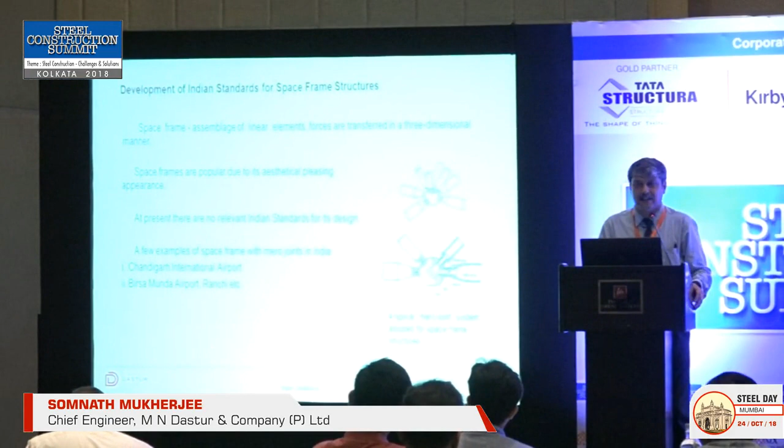This last point being, I'm sure we are going to see quite a few structures and presentations on space frames, which are definitely the thing in the market. But unfortunately, we have requested BIS, in the forum also, and the Undersecretary Steel, Mr. Sunil Barthwal, at the INSDAC forum, that the relevant Indian standard has to come out. Designers in India have to be much more dependent on foreign journals and international codes.

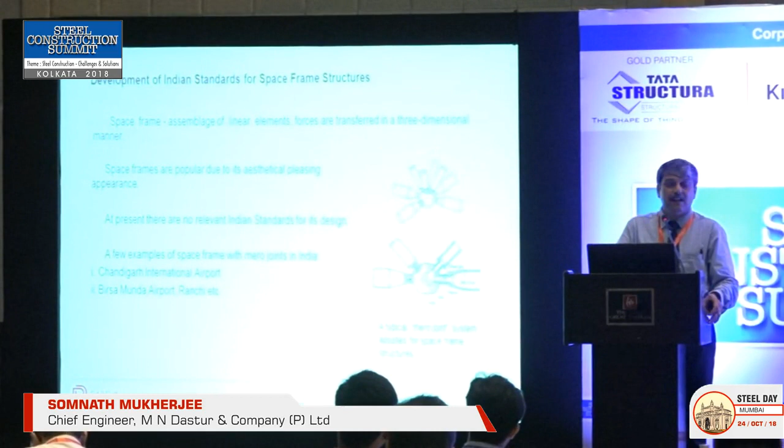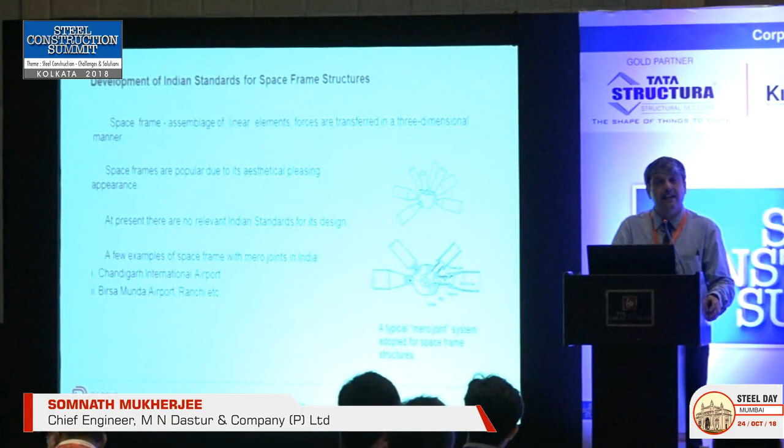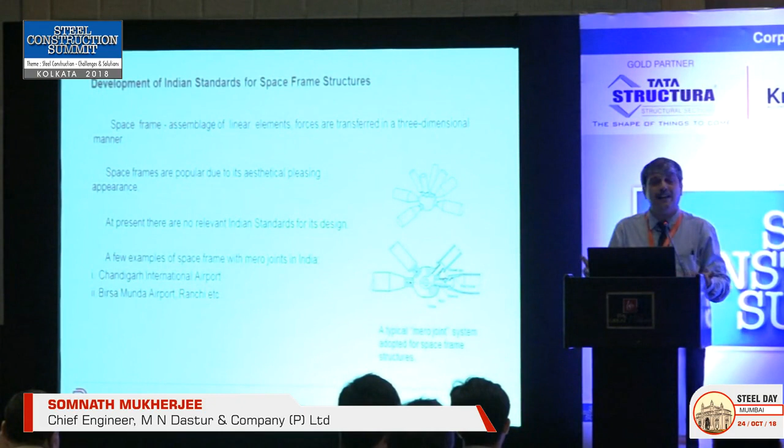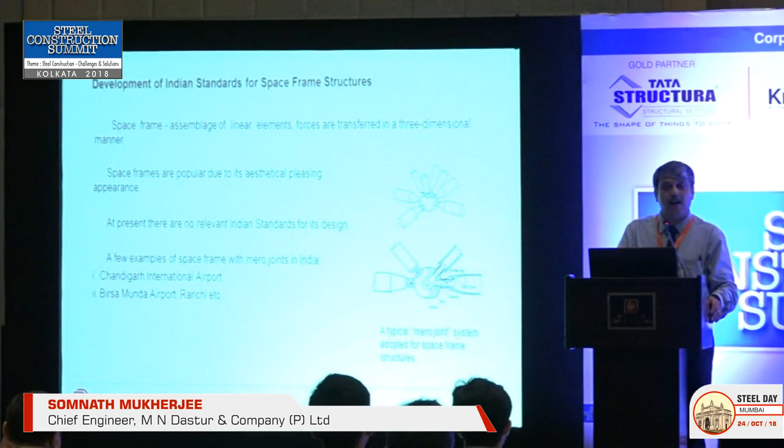Like the niche, patented design of the Mero joint, which you might have seen in the Birsa Munda airport at Ranchi and the Chandigarh International Airport. Quite a few airports were mentioned by Avneet at the very onset. This ball and socket kind of joint is called the Mero joint. The design is almost patented by the Chinese, and we also have the Canadian code, but the Indian code needs to imbibe these things. Otherwise, it's very difficult for us to design, and to design it correctly.

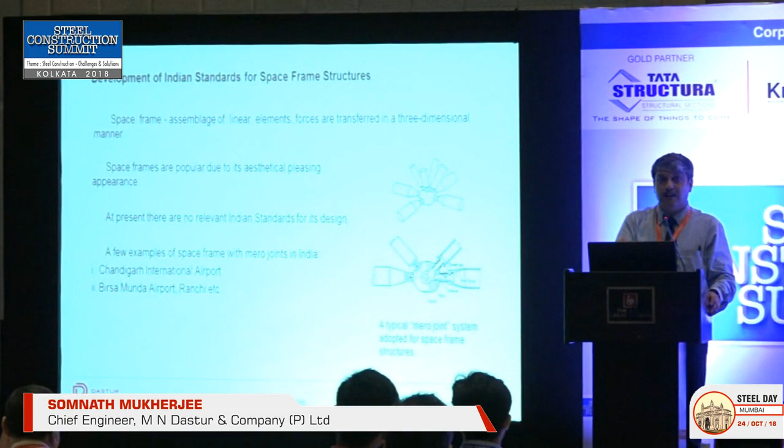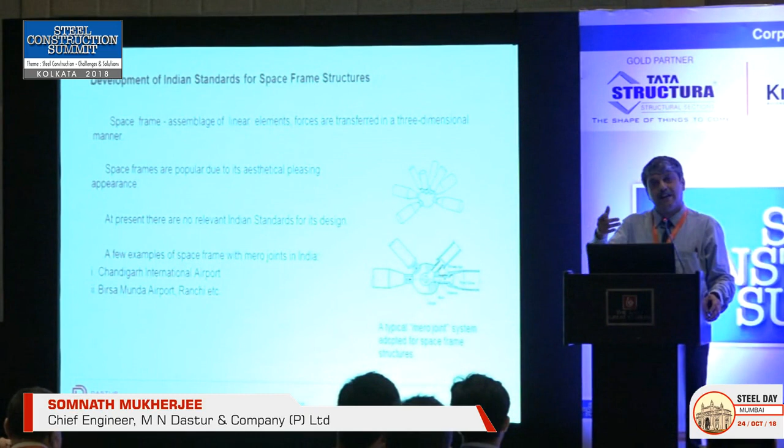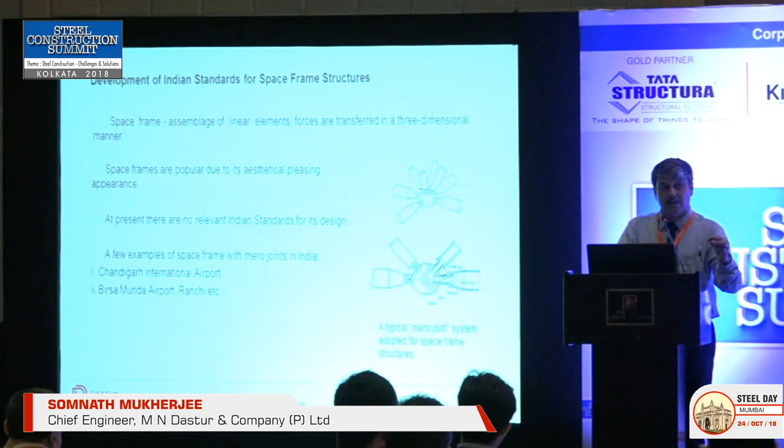So the Steel Construction Summit should also propagate that construction skilled personnel should come up with the latest technologies and meet the challenges. Thank you so much.